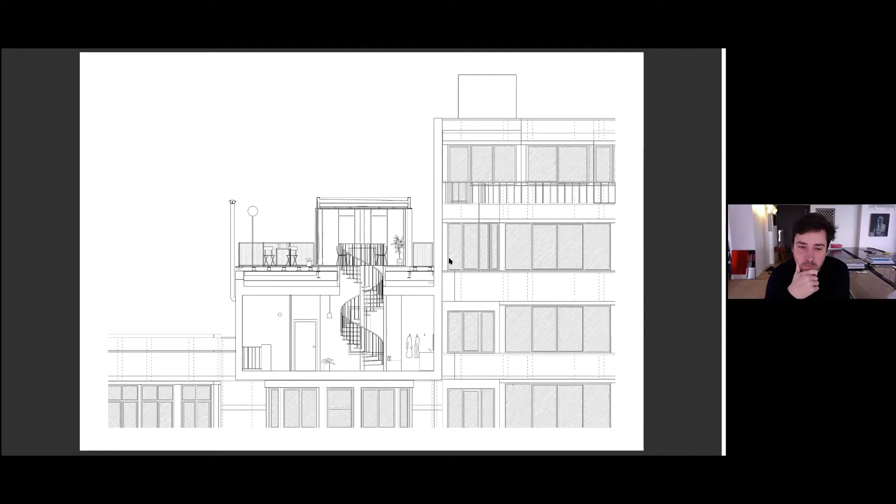And why we've done that, it's because what we understood is that the apartment that we renovated was quite detached from the upper level. The height that we had to get was like around 5 meters, so there was really not a lot of link that we could do, but a staircase. And so we wanted to really do a kind of object that's autonomous, that's in between the domestic landscape that they had under, but also that relates to the city.

And so I will pass it quickly. Basically there are spiral stairs that connect the upper level, and then when you go on the level, what you have is a kind of small kitchen with a huge terrace, but also this weird small space that's not totally logical when you propose to the client that you will have another facade that you'll have to pay for it. It's kind of a struggle, but we were pretty sure that detaching this small building would make it a real architecture and not just an extension or just a roof.

And so when you see it, you have this kind of small moments where you have a toilet that has a huge window facing the wall with this door. So on one side you have the feeling that, yeah, you have this view towards the wall, but you understand that you're in a building, a volume, an autonomous volume in itself. And then on the other side, it opens up towards the city. We had a lot of fun with small details, with those stairs and this kitchen going around.

What we are also interested in was to make a kind of building that's a bit generic in a way, that has small details, but also this terrace that has not a lot of stuff designed, but this small lamp that gives a kind of domestic intention to it, while at the same time it relates to this kind of lighting that you can find on the streets. So the building is quite generic, like I said, but we spent a lot of time doing small refined details that you can see on the upper right edge.

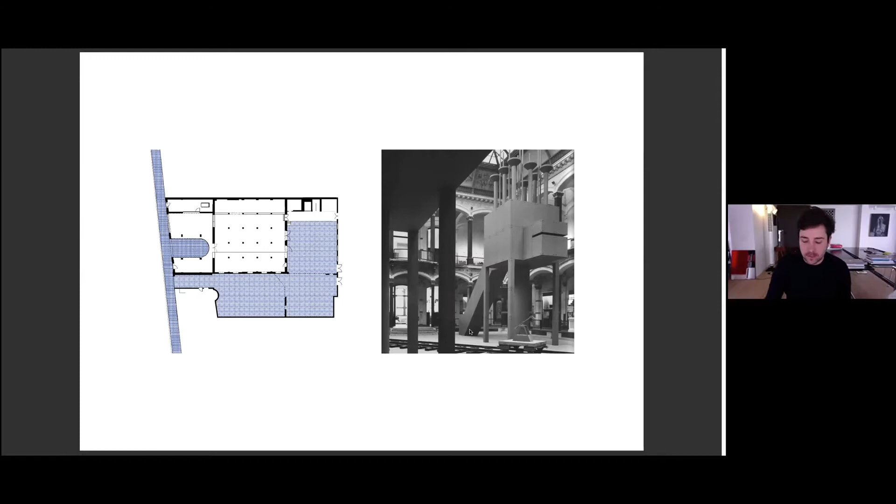So this is the building. Those are the collages that we proposed for the competition. Basically we proposed to open the facade and make two windows, one fixed and one that could open totally. Then behind this window you see there's a kind of weird steel structure.

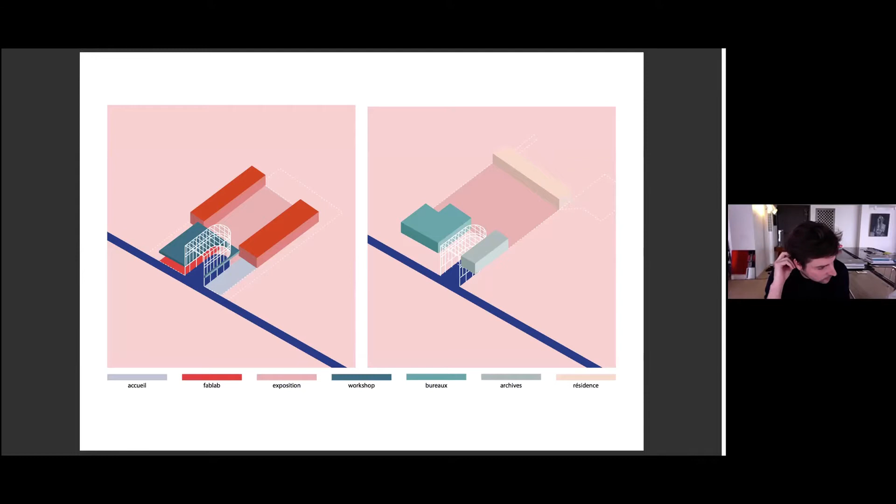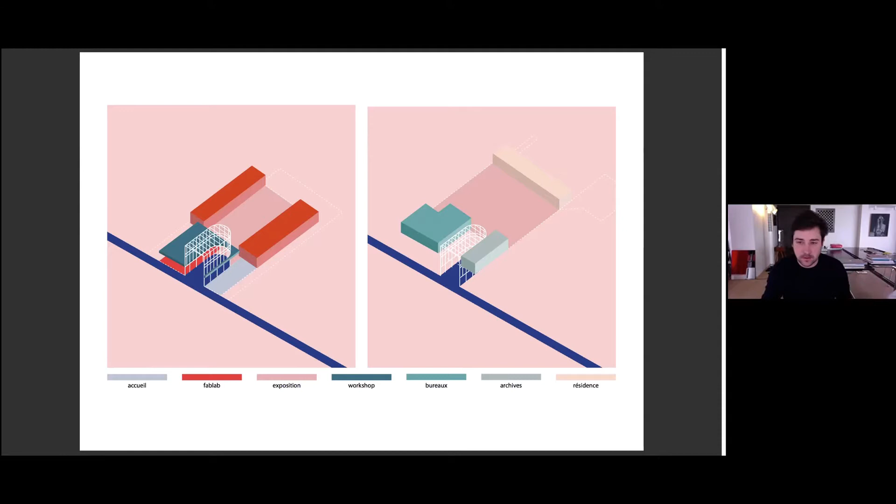That was the idea: to make the city enter into the building and to make a small architecture that can put in relation all the program and articulate the different uses of the building. What's important to say is that the program wasn't so defined during the competition, and then during the process, after we won, the program changed a lot. But this small architecture and the power of the space we created somehow remained and was able to handle those programmatic changes. That was the section of the competition.

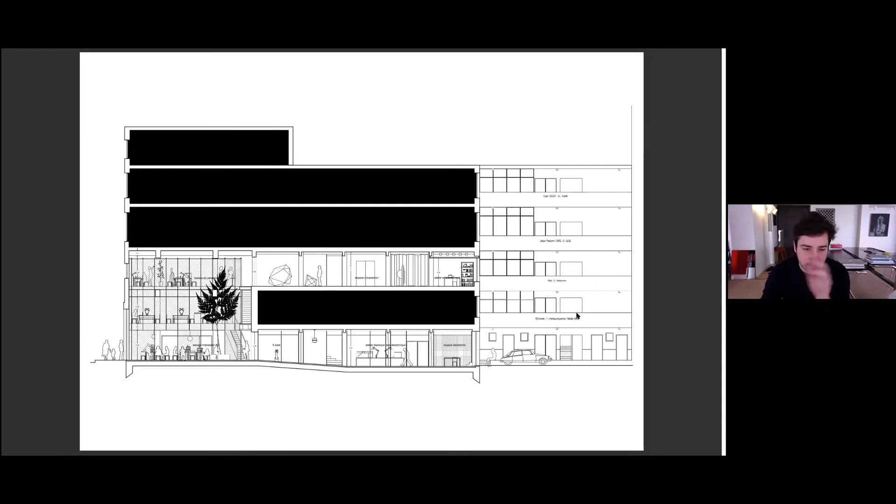So we created this three-height space, with different programs revolving around it. What was particular is that we didn't have this first floor, shown here in black, which then changed because we recuperated this floor and all the program actually went from the ground level to the first one. The Fab Lab was first on the ground floor, as you can see here.

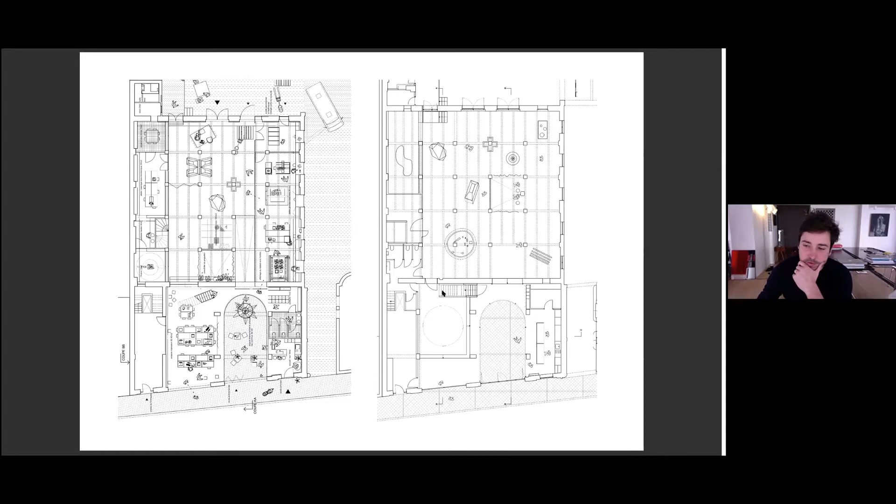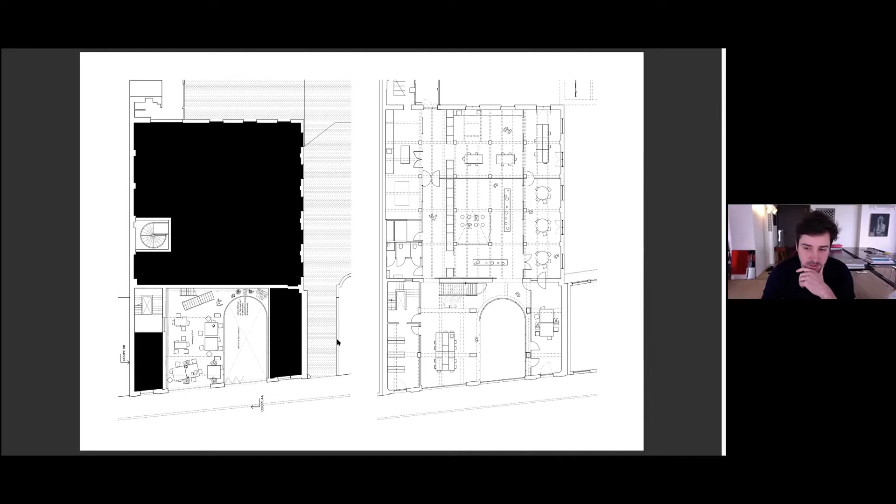So you had the entrance, the Fab Lab, and some public activities like workshops facing the street. But then it changed: the exhibition space came to the ground floor, there was a small bar and then a kind of conference room. The same happened on the first level, big changes, but the structure remains. Everything was evolving during the process, but this small space that was a strong link to the city, we really pushed for it.

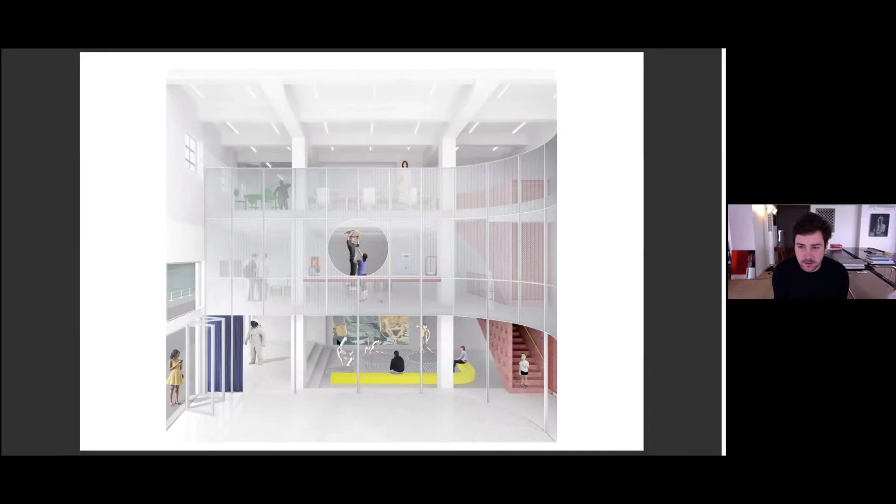So that was the proposal: the space was strong, but basically what we wanted was not an architecture that was heavy, but something like a filter. So we proposed this kind of steel structure that, from first glance when you enter the space, lets you see all the activities revolving around it.

You have the link with this courtyard that I was showing you in the beginning, and at the same time you have this materiality that we wanted really like a filter. So what we did is it took quite a lot of time to define this micro-perforated aluminum.

In order to have this kind of control of transparency. So how it works: when you have a lot of light in front of those elements it's quite opaque, and when you put a lot of light behind the element, it's getting totally transparent. So here you see this triple height, and then the rest of the spaces.

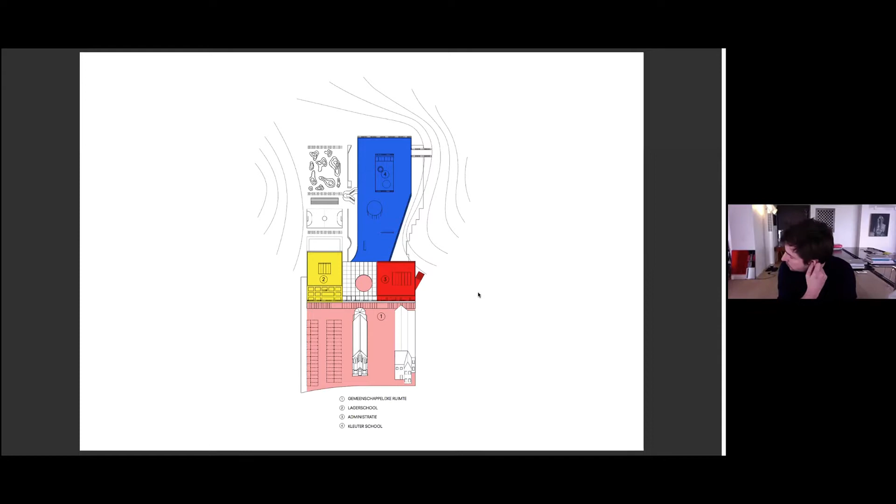The third one is the administration, and on the ground level we had all the public programs that could also serve during weekends, not just for the school but for the town of Dilbeek, which in their center didn't have any real public space — no piazza, nothing. So this could become the kind of small centrality of the village.

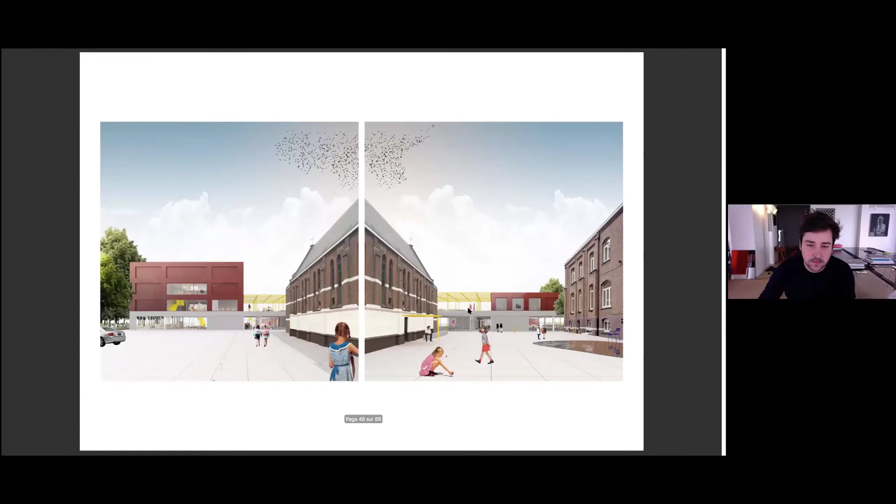So that's the building that you see with those two piazzas, with the primary school here, administration, and then the kindergarten sunken into the topography, two piazzas. That's the plan that you see, with those two entrances, one for the kindergarten and one for the primary school.

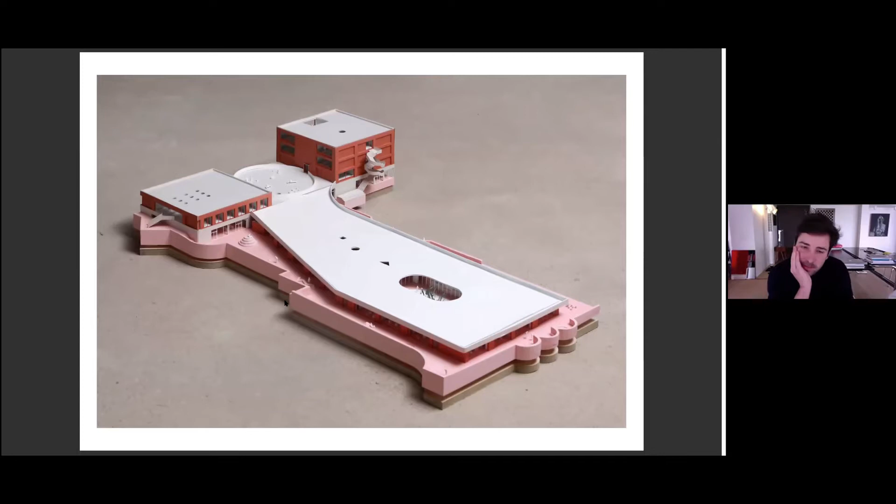So it has made this kind of weird building with a huge roof that here is totally in white, but normally it's a green roof. Under this huge structure, you have to imagine you have to make a kindergarten for 20 classes, which is quite huge. So how can you deal with this generic structure and make some interesting small scale architectural situations? That's something I'll explain a bit later.

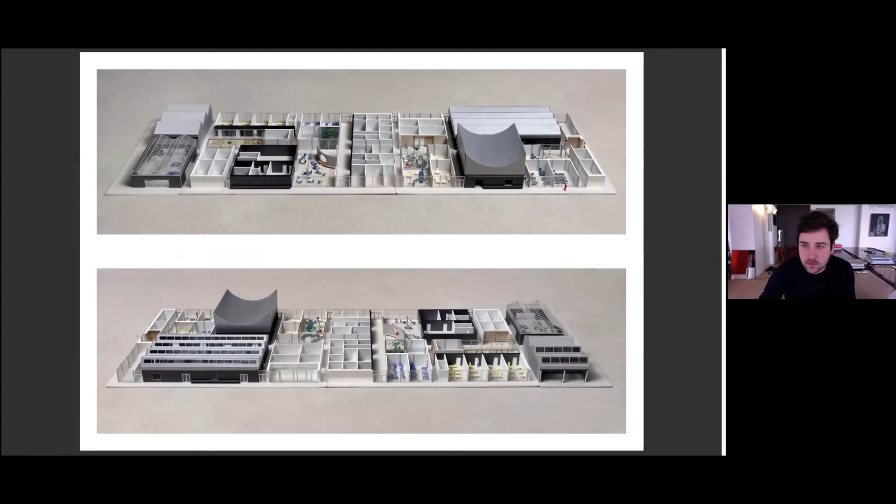So this is the model without the roof that you see. There's a kind of inner street with different patios lighting it up. Then you have those roofs of the workshops that are poking out of the roof. So those are the two models of the two schools. You see here the roof and the specific elements going up.

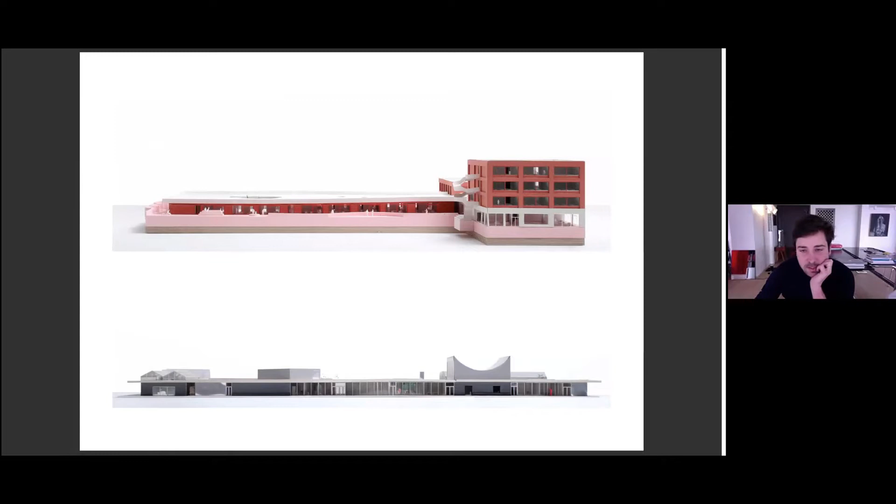This school, it's more in the plan that the specificity starts in the structure. So it's what you see here. If you compare the two plans, you have those small moments of articulation, small situations that try to give another scale to the building.

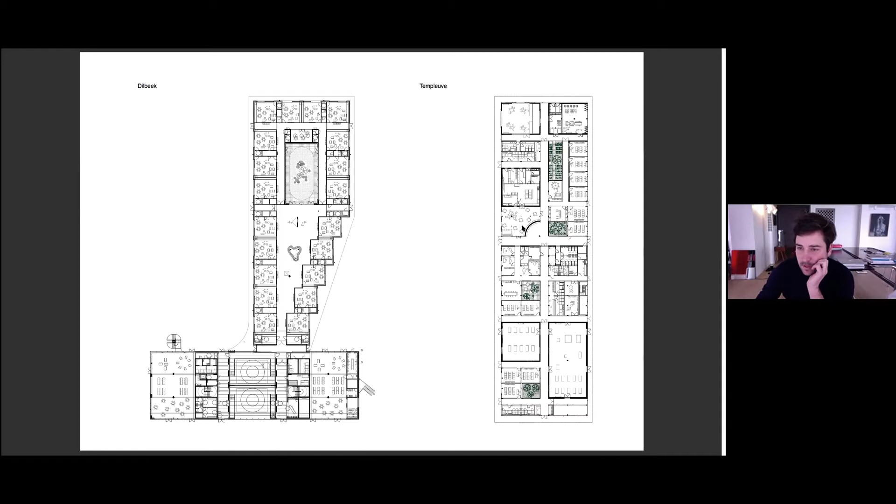And for Templeuve, it's the same, even though it's in this kind of strict geometry, we have a lot of small articulating moments that we created. That's always this question we have when we work on small scales, but also bigger scales: how to make situations with architectural elements.

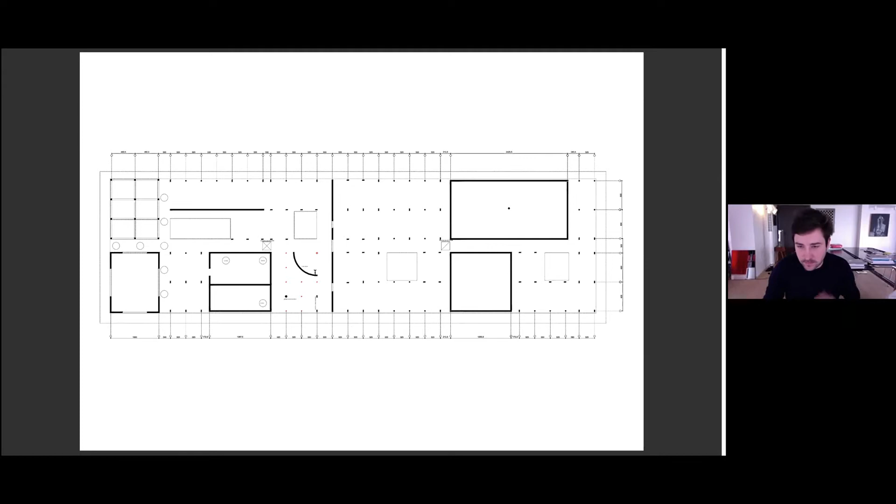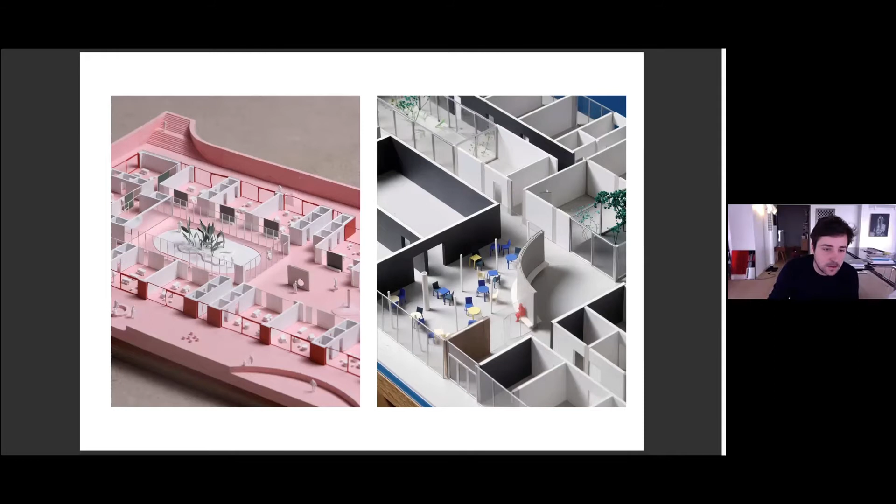And that, for example, we try to have in those two schools. So you see here this small cafeteria, but also you see here structural elements that are giving another rhythm, another scale to this huge agglomerate of classrooms. So those are the small moments.

And in the workshops, in the Templeuve school, what we wanted is really functional, simple, concrete spaces. And it's more the roof that was bringing different character, different light, different atmospheres.

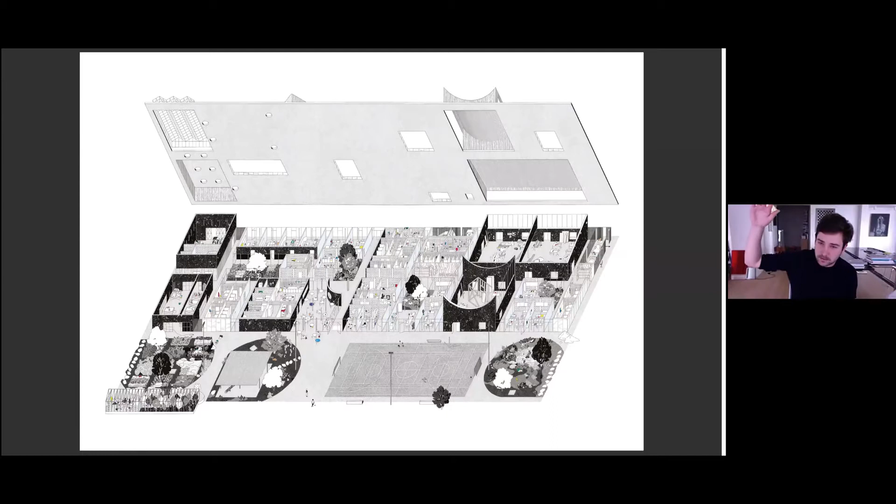So this idea about the scale, I think it's quite well resumed in this drawing that Valletta has made for us. Normally, when you're an architect, you're working with different documents in order to go through all those scale considerations. So you will have a drawing—a plan, a general plan, a section, a small scheme that speaks more about the idea, and then different details.

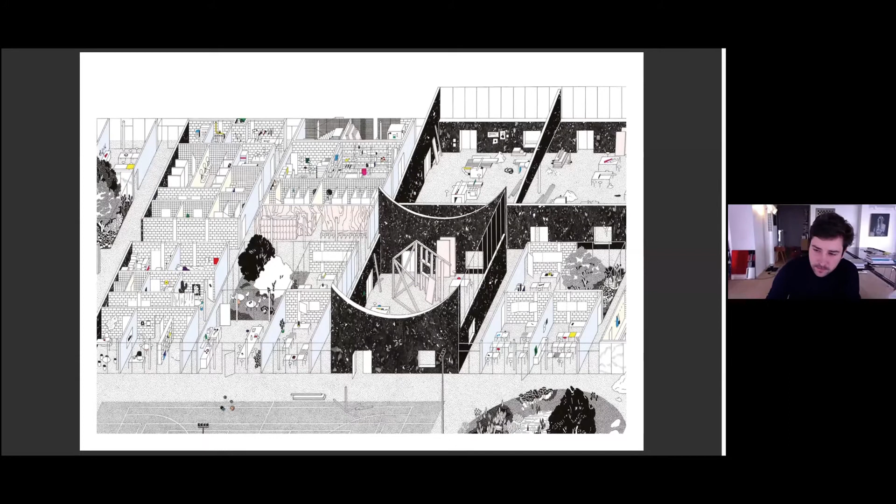And here what we like with this kind of drawing is that when you start to enter the project, you understand that all the intentions you had are starting to blend into one another, and that you have different moments—architectural ones that exist, but also small uses.

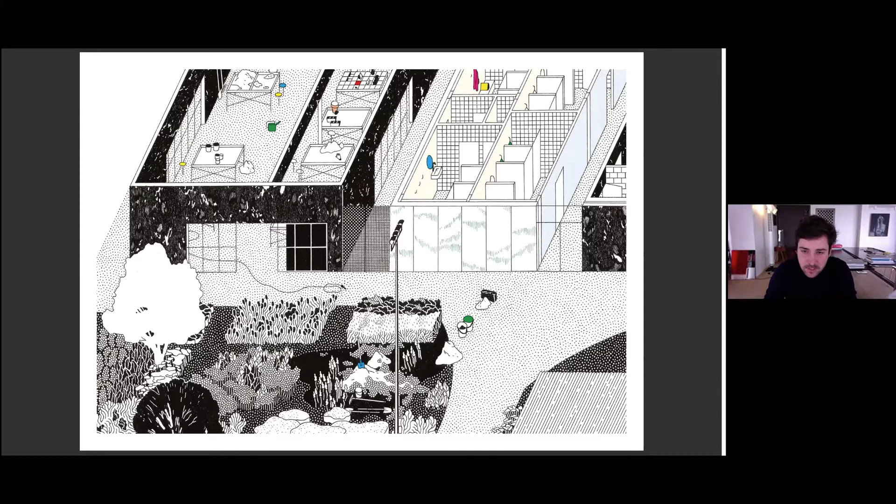And it's something that we find quite fascinating with this kind of drawings, is that here a shovel or this actually takes the same importance as the architecture in itself, and it's something that we want to achieve, is kind of grasping all the scales of the project in one document, in one idea, but also in one architecture. So how actually complexity can be crystallized in architecture. That's something that we really like to do.

And then just to finish, I will be quick. This is a project that we started during COVID. We were talking with friends about a general frustration that during COVID all the building sites stopped, and architecture is something that takes really a lot of time to do. So we just wanted to make a kind of collaborative project where we can be quite quick in making objects through direct fascinations.

Because I was talking about the complexity of architecture, architecture is really a complex work to achieve. And here what we wanted is to be quite direct. So what we did is we proposed to 40 people, architects and artists, mostly friends. Ahmed is part of this project, to choose one object of fascination or a work of fascination, and then basically to make from it a kind of form that will become a small piece of furniture.

So what we did is we contacted during COVID, through mail, all those people, and we proposed them a kind of protocol, a thinking protocol, and then we proposed to make the making protocol. And so the thinking protocol is basically what we asked - to choose one object of fascination.

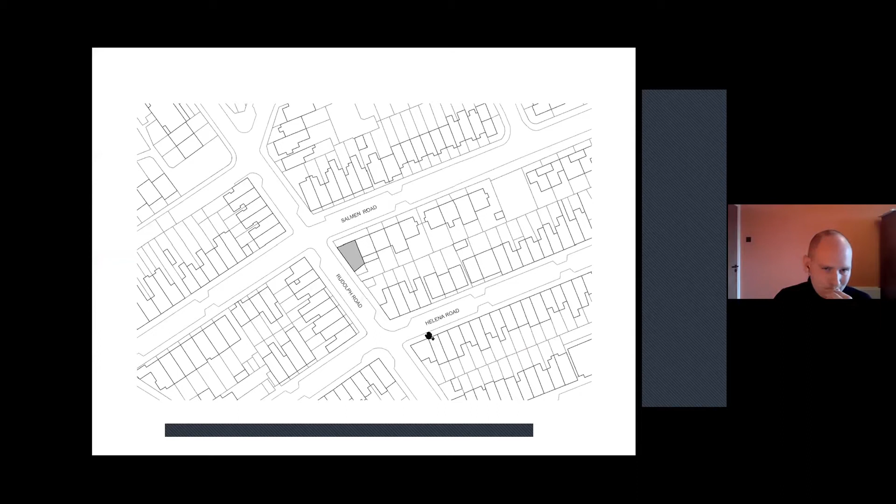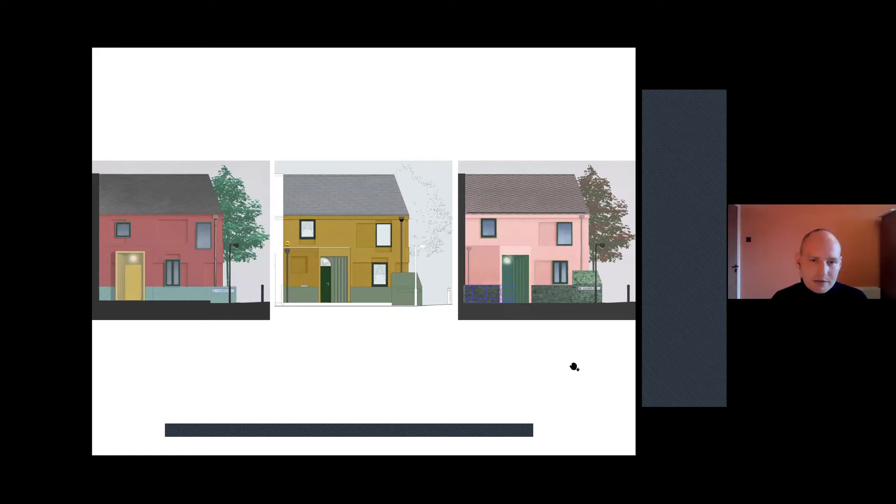What we were looking for was a way of making the house generous to the street. So we ended up using complementary colours that would visually push apart from each other, using colour theory to expand the house. We have a green plinth and then the complementary pink upper surface that would start to expand this house and push it out of the corner that it was on.

This was a way of using the position on the corner, but also increasing the volume and generosity of this building. So yes, testing materiality, testing the scale and composition. We always use self-coloured materials - here a pink through-coloured render, and then a green terrazzo which lines the doors and windows as well as forming this plinth. So the colour is always connected with a mattness or reflectivity, something that has properties of its own.

So this is showing a bit of a conversation between the building and its surroundings.

So I was talking about our approach of trying to fuse the two types of housing - the system-built housing of the 1950s, with its horizontal format of windows, which we felt, while synonymous with the rest of the terrace it was forming part of, wasn't really very good for bringing light into the building.

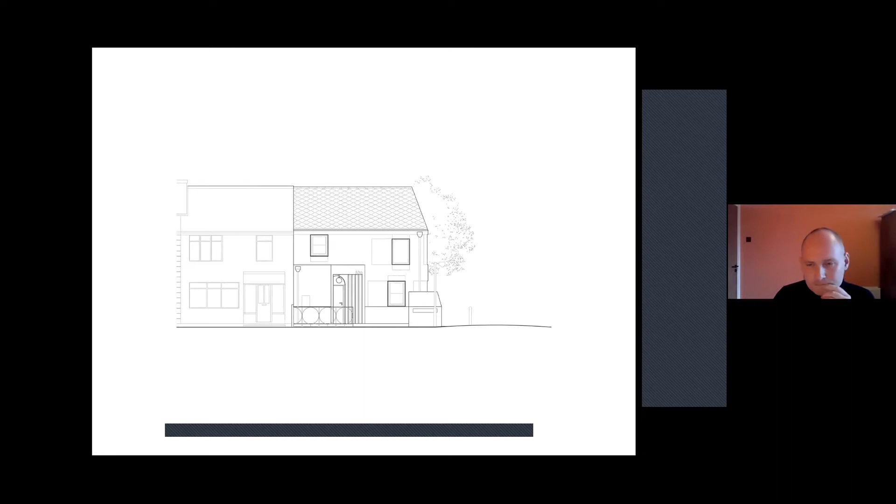And using this to give a richness to something that was quite flat, and make the most of this corner. So the pattern and the fenestration carries around the corner in order to have the conversation across the two sides of the building.

So here you see it completing the end of the terrace.

But also, as I was saying, through understanding that the colour is attached to the materiality, we started to find slightly unexpected things as we were designing and then building the house. So one aspect of that was the roof tiles.

On a sunny day, they would go this dark black because they're reflecting the sky. On a cloudy day, which we have a lot of in the UK and have a very nice one today, the tiles would go this really wonderful grey. And so we wanted the house to be seen in this way, and started to design it to look its best on a cloudy day.

The idea of something being seen on a cloudy day started to play into various other architectural features, both in terms of the detailing of some of the render, but also the final series of materials. For example, this doorway became a space where you would catch shadows on an overcast day, but also it would shield you from the rain as you were getting your keys out. So each of these moments would have a little story about bad weather.

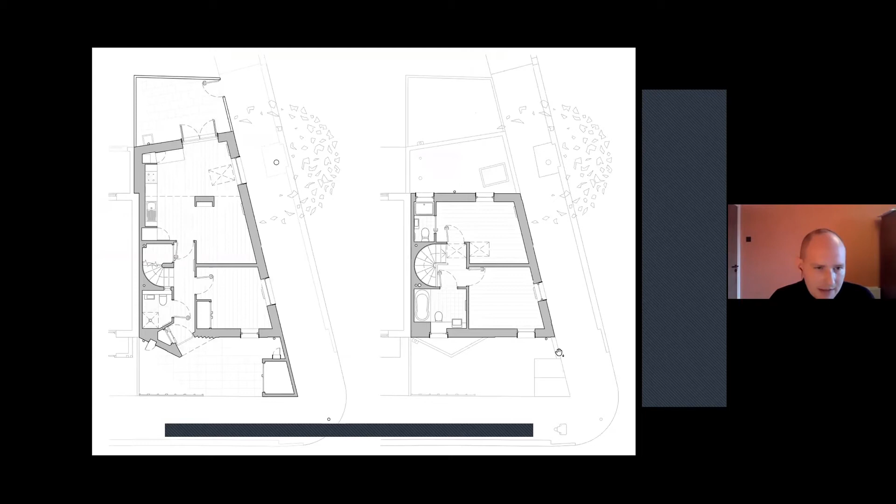So inside, we also designed it to be really generous for its occupants. We didn't know who they would be, but we wanted it to be a house that would be a special place for people to live in.

While on the ground floor we were fixed in terms of ceiling heights, what we did is made use of the volume of the roof, took out the loft, which isn't really used in rental properties, and gave the bedrooms 4-meter high ceilings. This created a really generous vertical space, and all the bedrooms have windows looking in two different directions, breaking up and opening the rooms onto the different roads around the house.

I think just one last thing: at the start of our conversation we explained that we work on public projects, but today we're talking about two private projects. In some way, what's been amazing is that Salmon, because of its position on this corner and its slightly speculative nature, has actually been reappropriated by people. We see a local fashion designer, and the previous person was a travel blogger, and they decided to use the facade of the building as something public, to take photographs in front of it. We felt that's an amazing way that this private project has become something publicly used because of its almost stage-set nature, which is a really lovely outcome.

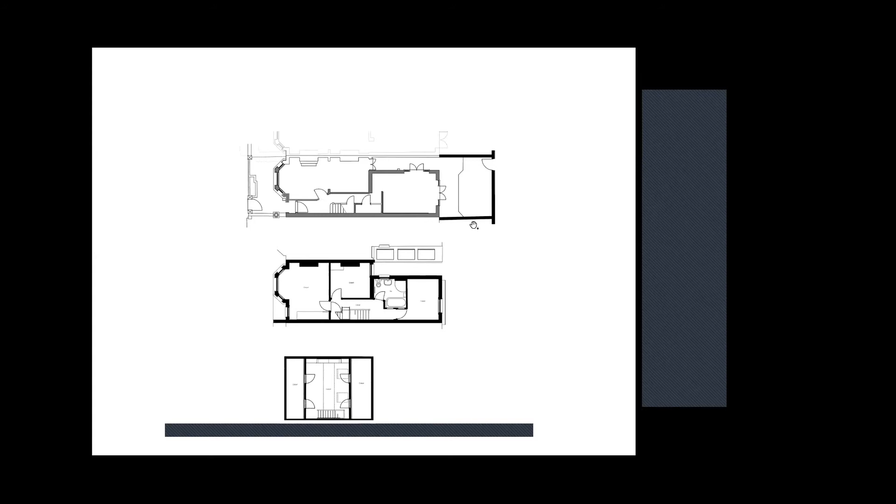We wanted to make the most of the spaces, to make the house feel like it was larger than it was. One technique we used was looking at how we could use colour as a way of elevating the spaces, but also to enlarge them, and perhaps to create different almost weather conditions in the different rooms. We've always been fascinated by Corb's use of colour, but in particular we were interested in a research project looking at the colour archaeology in Corbusier's buildings.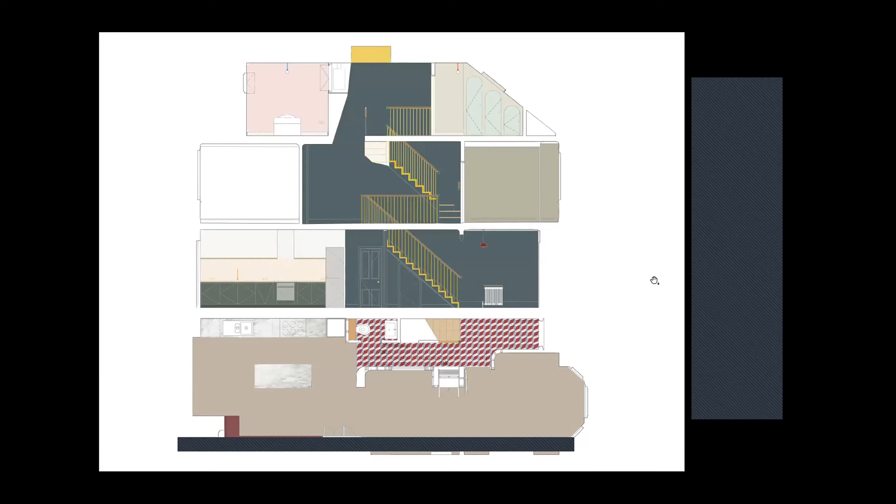So the way we wanted to use this lantern was in this staircase, which obviously physically connects all the different floors, but could also be a way of bringing light deeper into the plan of the house.

It became a kind of game, in a way—the adults wanted their own spaces, wanting to live predominantly on the ground and first floor, so the second floor became the space for the girls. This staircase was designed almost like a snakes and ladders game, where the girls would climb up to get to their rooms above.

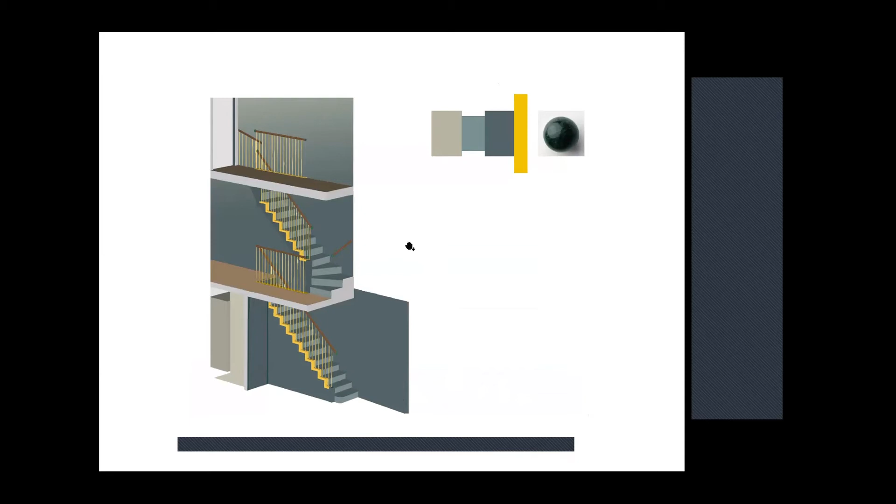We were keen to use materials and forms that would suggest a kind of game in the staircase. For example, we used spheres at the end of the handrail to suggest the start of the game, or the start of the ascent. At the beginning we used really cold marble, so that when they touch it they'd immediately be alerted to the fact that they're climbing the stairs.

Here's one of the girls climbing up, and at the end you'd have the sphere announcing the end of the game.

This large lantern—we used yellow as the frame colour for the window and lantern reveals. The idea was that it would reflect a warm colour, perhaps not the colour or light you would usually have in London.

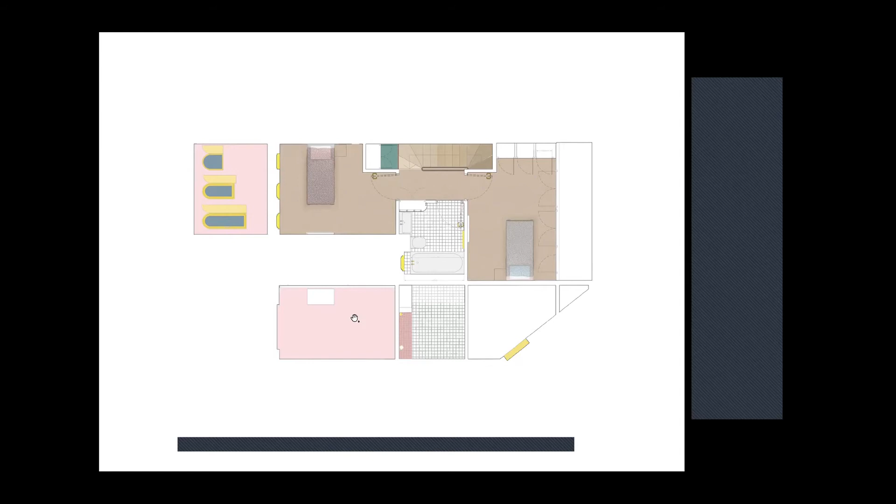This is a plan drawing of the bedrooms—two bedrooms were added at the top with a bathroom. We also used curved openings and arched windows, with the idea that each girl would have her own arched window to call her own.

On the outside we used upside-down arches made of cedar shingle, left in their natural form. When first installed they're a brownish, almost red colour, but that slowly changes, becoming grey over the years. The idea was that as the girls grow up, the materials externally would also change with them.